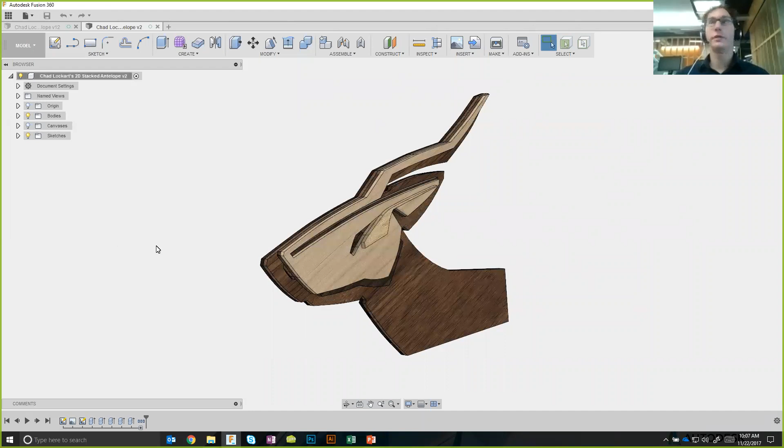So I told you earlier, we're going to be designing a 2D stacked layer product. In this particular case, we have this really cool antelope, and we're going to be showing you how to take it from a sketch all the way to 2D.

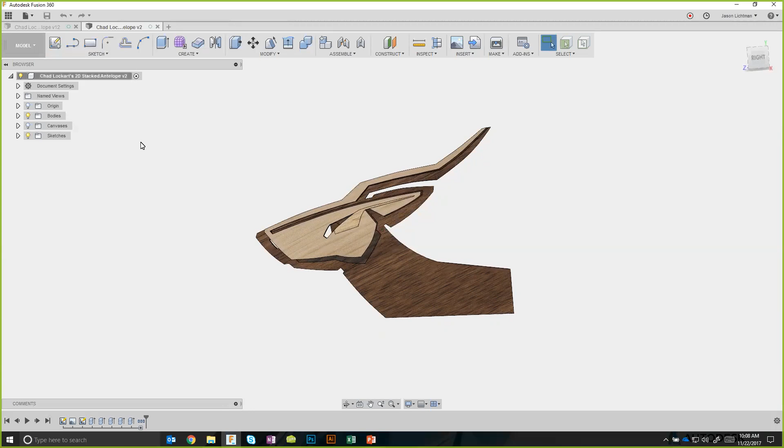As a preview of what we're going to be doing on the next webinar, we're going to be taking a very similar design, the same sketch, and we're going to turn it into the same 2D stacked layers, but this time much more 3D. Because if you notice right now, all of these layers are all parallel to each other. It's really just stacked on top, and that's it. But if you wanted to turn this into a 3D thing, you could do that as well.

And so this is the same design, and this time you're going to see that it has a plaque as the background, and the design itself is mirrored on the left and the right side. So it doesn't matter which side you're looking at this from, it's cool either way. And we're going to be going over how to take a similar design as today and show you how to make it more 3D like this and add a plaque as well.

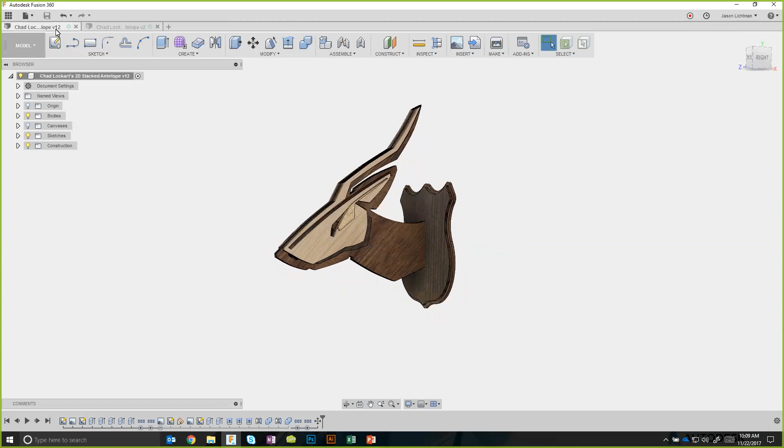So I'm going to continue on. So we said today we're going to be focusing on this antelope and how we made it. So the first thing we have to do is come up with a plan on what we're actually going to design. In this case, it's going to come in the form of sketches.

Let's come here into my folder and let's take a look at what we have. We're going to go under here, and I believe my images, I believe it's going to be this one. Nope, go back. There we go. No, also not. Hold on just a moment, everyone. There, I finally found it. I apologize for the delay.

And once he comes up with a plan, he's going to have one of these in particular that hopefully he likes better than the rest. And that's what we're going to actually use today. So I'm going to go back into Fusion, and I believe we showed this on the very first webinar, but if we were to start from scratch here, I'm going to show you a new design.

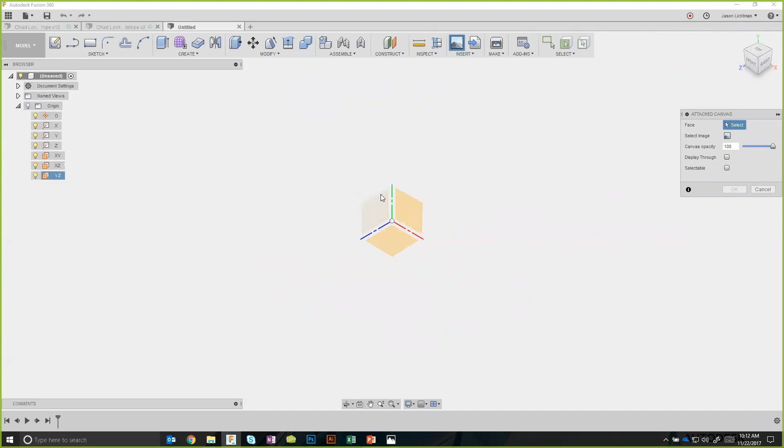If I look at the same thing, I can see that the front view is parallel to the Y and the X, like that plane, and the right view is parallel to the YZ. That can also be looked up over here on this origin area on the left. I can come in here and choose the right plane by picking YZ, or I could just pick it visually in the center of the graphics window. So I'm going to pick that, and now I get to pick my image.

It turns out in my laser cutting folder under laser antelope, I have image number 1. When I bring this in, I want you to notice that the scale, looking at this in a right view, is really small, or at least it seems small. But I can change this anytime I want by simply grabbing on this manipulator and stretching it out.

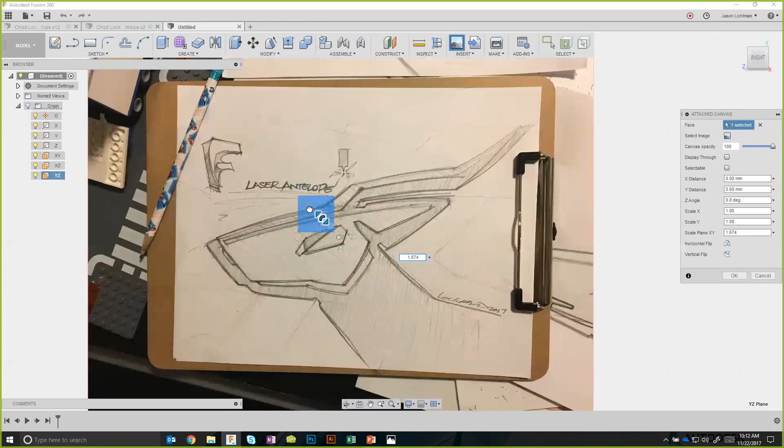I can also use the up manipulator to drag up and down, the left manipulator to drag left and right, and then I could drag this square, and then it lets me drag anywhere I want. So I can set this up however I want, and then I can also scale this however I want. But if I have a size that I'm thinking I want to use, then we should set that up as well.

I'll show you how to do that in a moment, but before we do, there are a couple of settings I like to turn on. I like to turn on display through, which is going to allow any 3D object you create in front of this image to be semi-transparent, so you can actually see the image through the 3D object. And also, what's going to help that, especially for sketching, is changing the canvas opacity down. You can pick anything you want, something like 50%, whatever. I don't pay too much attention to this, as long as I can see that it's semi-transparent, then I'm good.

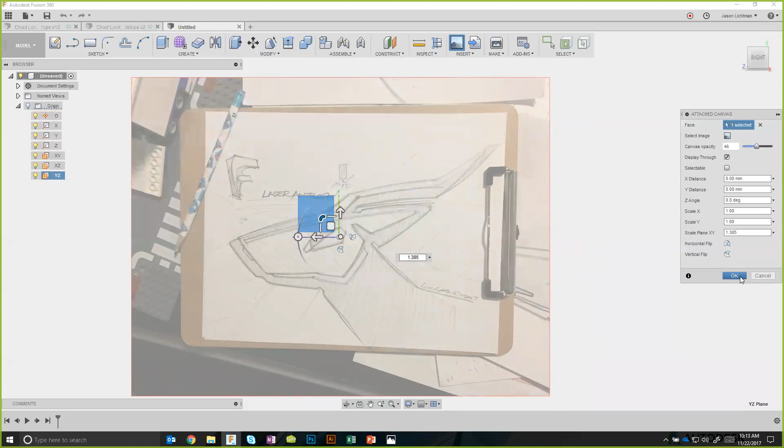Then I have this folder here called Canvases. If I click on the Canvas folder, I have my image, and I can right-click on it and choose Calibrate. The cool thing with Calibrate is I could pick any 2 points, like maybe the point of the nose of the antelope and the very far area on the back of the antelope, and I can now see a distance between the two and choose how big I want this to be. So this could be any size you want, whatever you want is fine.

I could pick 12 inches, even though you saw metric a second ago. Hit OK, it scales it up, and when I zoom out, now the distance from this side of the antelope to the back of the antelope is about 12 inches. So that's really helpful for sizing.

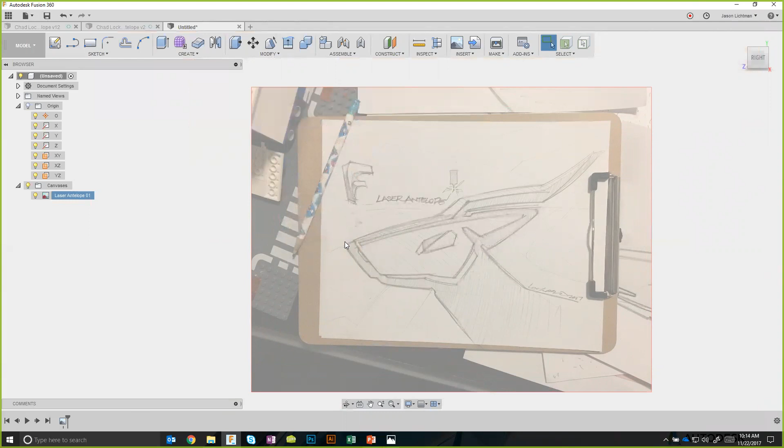Now that I have this, I can start to actually make my sketch. So I have this thing, I'm going to go on the same plane as before, the right plane or the YZ plane. I can right click and say create sketch, and now my goal is to actually trace my image.

So I have all these tools in this sketch drop down that I can use. I can use lines, rectangles, and we have 3 different kinds of rectangles, circles, and we have like 5 different kinds of circles, arcs, polygons, ellipses, slots, splines, which are a more advanced technique that I don't think I'm going to go over unless we end up having a lot of time at the end.

I'll go over splines. We have points, we can do text, and then these things at the bottom are basically modifying existing sketch geometry. But if you want to start off and create new geometry, it's these things right over here. Let's start off and figure this out as we go.

Lines are obviously the simplest, right? Lines are going to be straight. So if I pick a point, let go with my mouse, drag the mouse and click again, I'm going to end up with a literally straight line. If I click again, it can basically continue and make as many lines as I want. That's not exactly what I want in this case, so let's delete this whole thing and try again.

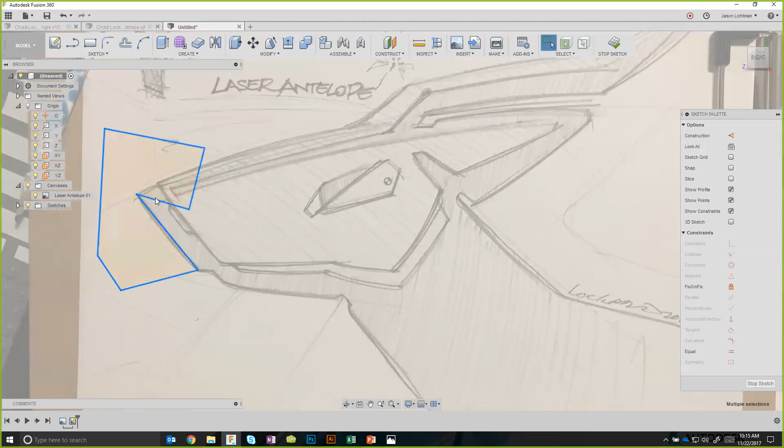This time I'm going to use the L key on my keyboard, which is a shortcut. You notice that the mouse cursor changes to an icon that represents that we're going to do a line. I'm going to click on the first spot, click on the second, and this time I'm going to hit the Enter key and it finishes the line.

Now, technically speaking, this is sort of following the sketch in that the points are in the right place. But notice that the sketch itself realistically was curved here. It wasn't really straight, so I don't think a line is actually going to be the best choice.

But we do have another tool here called Arc that I think is perfect for most of what you're going to see here on our antelope. So I'm going to pick this 3-point arc. This time I'm going to click in the first place, click in the second, and then when I move my mouse, it's actually making an arc where the radius or diameter changes based on where I click the third time. So I'm going to come in here and click a third time in this spot right there.

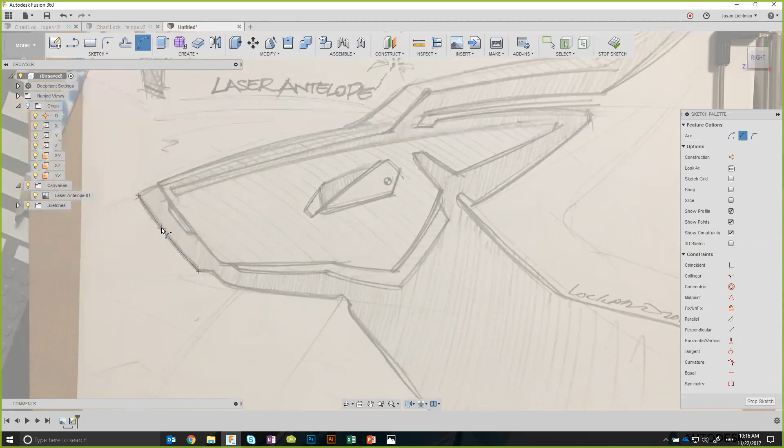And now I have a traced area of my sketch that I think is actually looking much better than the straight line. Now, I could do a couple of things. I could leave this exactly how it is and just continue on.

And if you recall from our previous webinars, if you have a line that's blue, or any actual sketch entity that's blue, it means that you can move it. So I could click on this and drag it and it'll move. Moving it is both good and bad, right? In this case, I'm following my sketch behind me and I know that this is actually where I want it to be, so I really don't want it to move.

Now, we talked about how you can make things not move, right? The way you could do that is basically 2 ways. You can apply constraints that are here on the right-hand side. Like I could say that I want this circle - and I'm going to make this up right now - this circle and this circle, I want to make the center of those 2 things coincident. And now they're going to force themselves to always be on top of each other, even though I could still drag the diameter. That's one way, those are constraints.

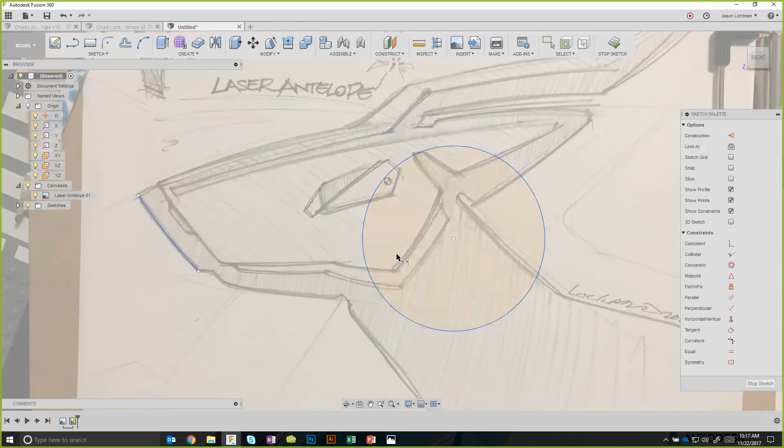The other way I could do it is apply dimensions. So I could say something like I want the diameter of this circle to be this amount. And then I could say that I want, let's say, the circle to rest on my origin, and then it's going to turn black. When it turns black, that means that you can't move it anymore - at least you can't drag it. I could still change my dimension, but I can't actually drag it, and that's why it's black. But if I get rid of my dimension, hit delete, now it's blue again.

Now there is a trick for you, another thing you could do. If you want to see what the size is as you're dragging it, I'm going to hit undo so that my dimension pops up again. This time I'm going to right click on my dimension and choose toggle to driven. And now you're going to see parentheses on the outside of the dimension. What that means is that I can actually still drag my circle in this case, and the dimension changes.

Basically, this dimension is in the passenger seat. I'm driving the size by dragging, and this dimension itself is being driven - it's sitting in the passenger seat while I drive the vehicle that changes the size. I hope that makes sense.

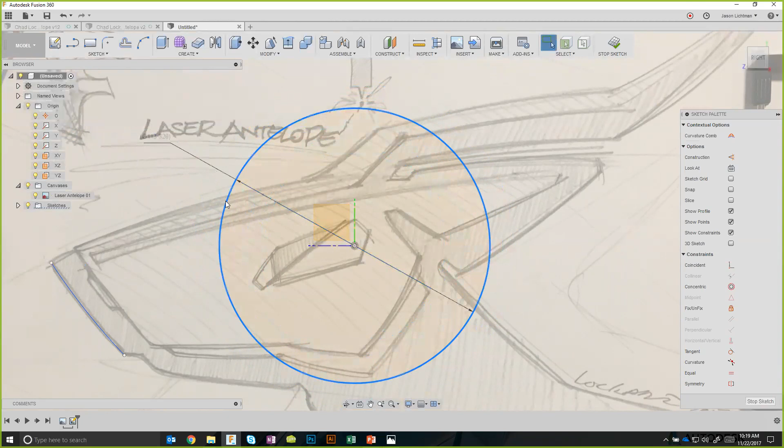I can apply dimensions and I can apply constraints. Now there is a third way that you can make things not move, and that is to basically say I want to lock this thing into position. The way you do that is a constraint called fix or unfix. If I pick this circle and choose fix, you're going to see it turns green, telling you that this thing is fixed.

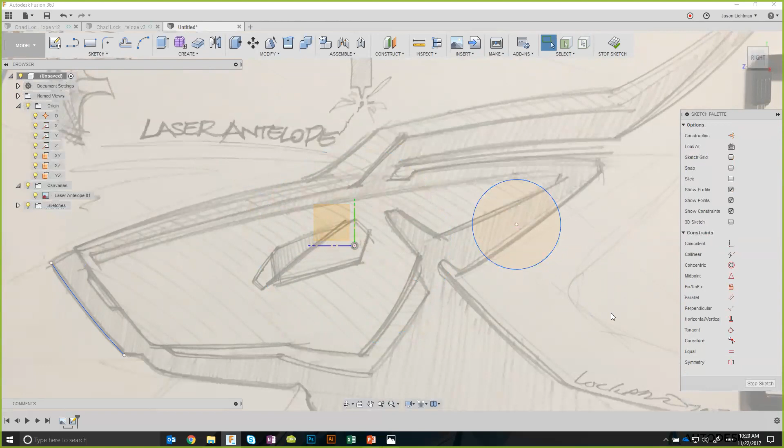No matter if I put constraints on this or not, if I just draw a circle in space and click on it and say fixed, the center and the actual diameter are all going to turn green and are not going to be movable. I can't drag this anymore. If I do want to move it, I can click on this again, click fix or unfix again, and now it's unlocked and I could still move it around or reposition it.

For something like this, where you're sketching on top of an image, I think that locking things down is actually going to be your friend.

In this case, I'm going to pick this arc and fix it in space. Notice, by the way, that the arc itself is green, but the endpoints are white, which means I could still drag these around - but I actually want those to lock in space as well.

So I'm going to pick these two points, hold control between clicks so that I can select both of them, and I'm going to choose fixed for that as well.

Now I do want to show you a variation real quick before I move on. If I undo all of that - perfect, so now I still have the blue version - if I pick the endpoints only and fix those, I can't move the ends anymore, but the arc also has a diameter, and I did not lock that down yet. So if I zoom out, I could see the center of my diameter, and I can come in here and move that and still change the size.

So for something like an arc in particular, you are going to need to lock down the endpoints and the middle as well. So now I pick the middle and say fixed.

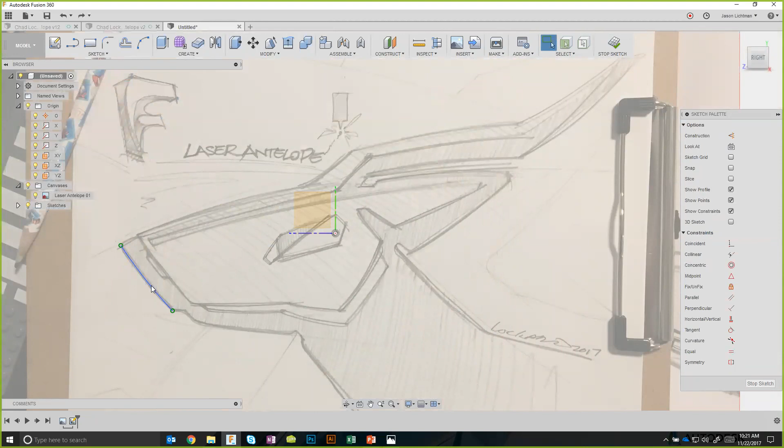Now I want to come in here and basically do the same thing over and over again until I get what I'm looking for. So I have an arc like that, and I'm going to fix that in space. I'm going to take this endpoint and fix that in space. I'm going to do the same thing again - maybe this time I'm going to go like this, something like that.

You know what, I'm looking at this, and I'm thinking this is actually supposed to be straight. So let's draw a line from the end over here to this point over there, and I'm going to lock the end of that line. That by default means the entire line is now locked down.

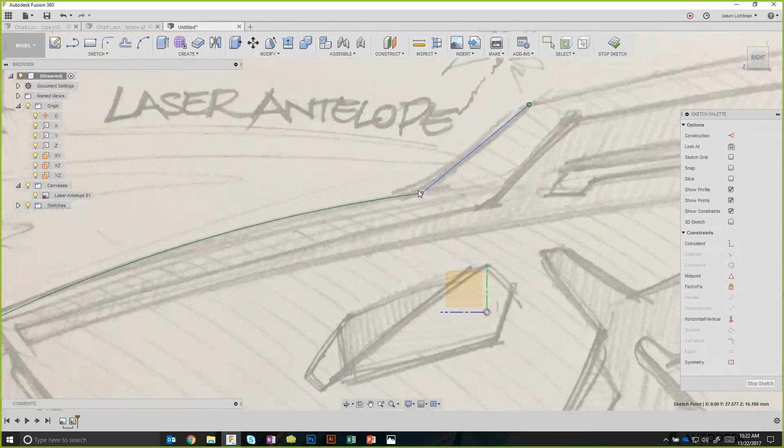But the base of this line isn't exactly in the right spot. So like before, I can click on this endpoint, hit the lock button again, and it unlocks it. And now I can come in here and adjust this slightly until I get it where I want, and then I could lock it down again.

Cool, so I'm going to go ahead and do this a little bit faster now. Perfect, lock that down. We don't unfortunately have a keyboard shortcut to fix things in space, at least at this point. It's a little unfortunate, but we are working on being able to customize shortcuts for locking things down - that's something on our radar and we're working on.

Perfect, so now I'm doing a line. I'm going to fix this line. Perfect, and that point right there. Perfect.

I'm going to jump ahead and show you what this will look like when it's done, since we only have 38 minutes left and I don't think you want to watch me sketching over and over. What I want you to know is that what I'm sketching is really just a combination of arcs and lines based on this particular geometry. I don't see anything more complicated than that here.

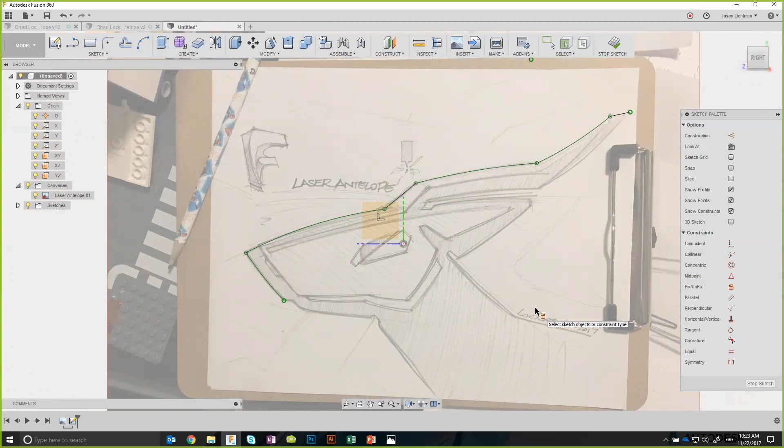Let's go look at our finished sketch. Notice again, just like before, everything is green. All the endpoints are green as well, which means everything is locked down. You also have these orange circles that I added, which weren't there at the very beginning. I'm intentionally not going to tell you what those are yet; we'll show you later in this lesson. But all in all, this is a lot more detailed sketch than when I started.

Let's show you what the canvas looked like. This is the background image, and you can see all of my line work on top. Is this perfect? Absolutely not - I did this pretty quickly and didn't make it perfect. Keep in mind that the sketch you're using as a background is really just a background image, and you don't have to actually follow it. It's intended, for the most part, to be there as a guide for your design.

What I want to stress is that the design itself is not the sketch. The design is what you're drawing in Fusion. As long as you're happy with what you're drawing in Fusion itself, I don't really care if it matches the sketch behind it - for the most part you want the same design intent, but it doesn't have to be perfect. For example, the nose of my sketch in Fusion is not in the same place as the nose on the actual 2D sketch that came from Chad Lockhart.

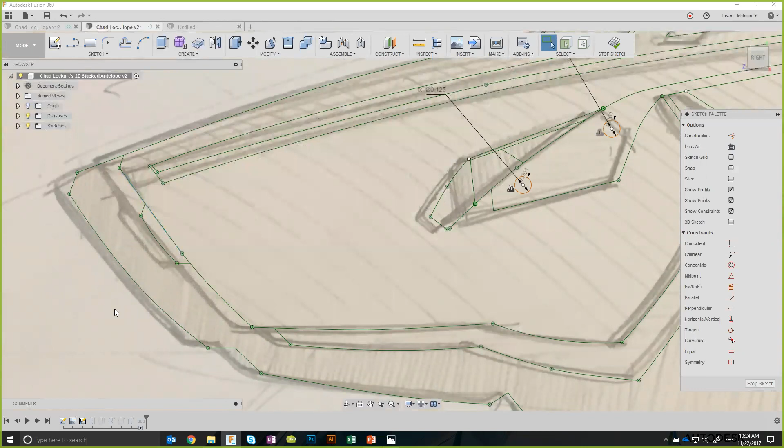Let's get rid of this canvas. Notice that the actual antelope has this yellow fill in between all the green lines, and depending on where I hover with my mouse, different areas of my sketch will highlight. The way Fusion works is that it looks for a closed loop of sketches.

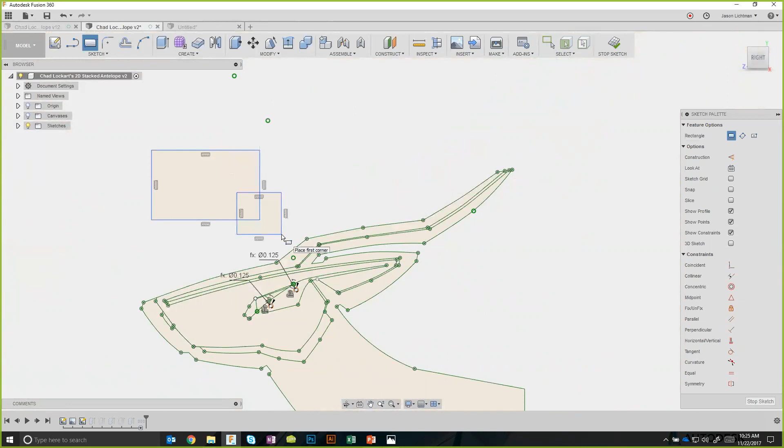So if I draw a rectangle, and then another rectangle slightly overlapping, I could want to do something with this area, or this area, or some combination of them. Basically, Fusion is showing you all of the different combinations. Let's get rid of that square, that rectangle, and this one too.

Here I have my sketched antelope, and we're going to stop the sketch. I'm happy with that so far. Let's go through line by line what's happening here in my timeline to see how I actually built it.

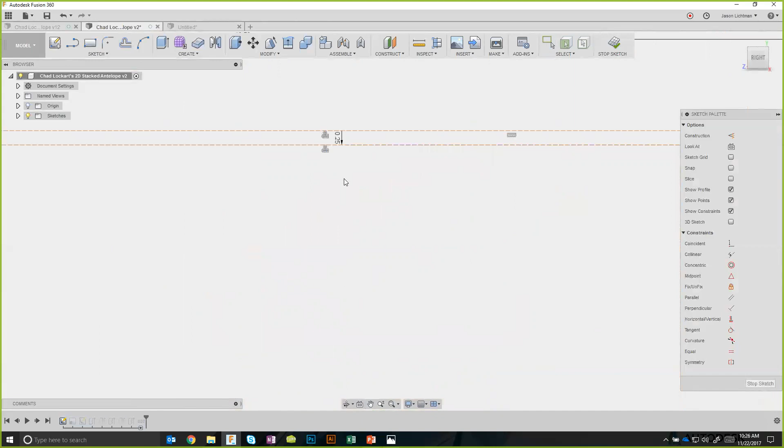Another thing to note that I should have mentioned at the very beginning - I created an additional sketch representing the size of the Glowforge bed, which currently is 11 inches tall and 19.5 inches wide. Then I made an offset of a quarter inch, and you can see that dimension right over here.

Let's get rid of it, and we'll rebuild it so you can see exactly how I did it. Let's pretend I'm doing this from scratch. I hit the letter R on my keyboard and make a rectangle. Then I hit D and put a dimension for the width, 19.5. Then I clicked on this left vertical line, clicked again, and hit 11 for 11 inches. Then I double-tapped on the entire thing and hit this little box called construction - I did this because we're not actually going to use this to build anything.

I'm using it more as a reference to make sure that everything that I build in Fusion is actually going to fit in the Glowforge bed. So I don't really need it to be a closed line. In fact, by keeping it dotted as construction, it's going to let me not select it by accident, which is going to be helpful, so I do encourage you to make it construction.

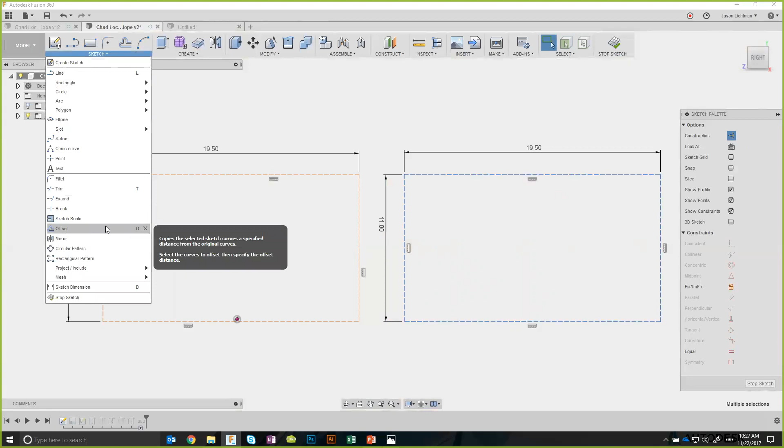Then I can double tap on any of these lines and it automatically selects the entire rectangle. Then I can come under Sketch, Offset, and drag this in to make sure it's inside my box. I could type in 0.25, enter, and I chose 0.25 inches, but you could choose whatever you want.

Basically, we all know that the camera on the Glowforge is not perfect, and the alignment could be off by about a quarter inch. So what I'm doing is making sure I stay a quarter inch away from the edges of my material so that I don't accidentally laser off of the material and waste a chunk of it. By keeping it within the boundaries, I'm not going to have any issues there. Think of this, if you come from a background in graphic design, as like my bleed area for my part.

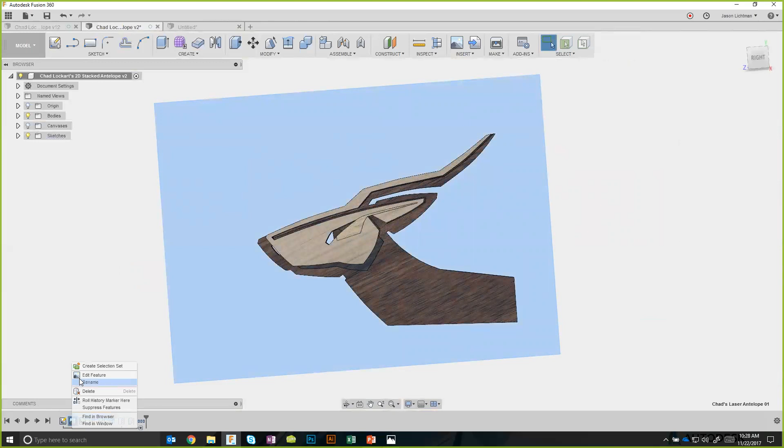So I'm going to undo all of this because I already had this set up. Get rid of all that. Perfect. And the cool thing here is when I actually brought in my image, I made sure that my image itself—let's go and edit that—there we go, is within the boundaries of my Glowforge.

So this way I make sure that no matter what, I'm not making the scale too big so that I can't even laser cut this on the Glowforge. It's all within the bed and it's going to work out no problem.

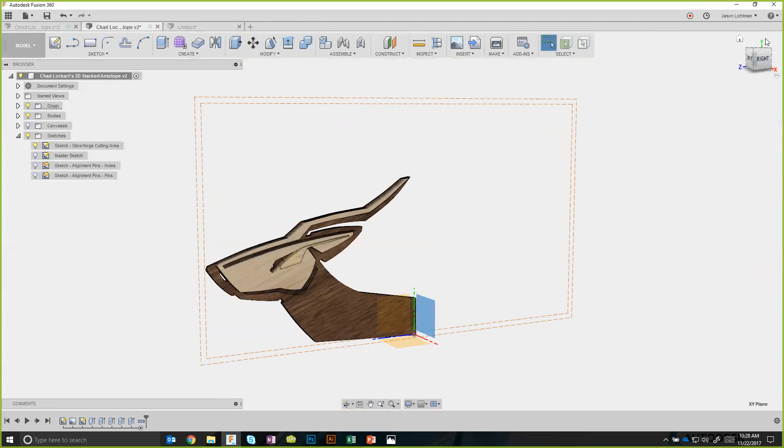So this is just a preview of how I set this up. And I also set it up so that the back of the antelope is actually on the same area as the front plane of my part. That's as though this were sticking out of a sidewall—like I basically took this entire thing and shoved it in the corner of my wall against the wall next to it. Okay, so now that we have our sketches, let's actually take a look at that.

We're going to go back in time on my timeline. To do that, I'm going to drag my mouse until I get to here, click with my left mouse button, and drag backwards. Basically now I am at the moment in time where the sketch for the antelope has already been created, but the 3D stuff has not yet been created. So we're going to go and actually do that ourselves.

To do that, I'm going to click on the Extrude button here, and you can see a pop-up telling me what I'm actually doing. When I do that, I have to select a profile. Just like before when I was in that sketch, I can hover over here and see all of the different options I have available to me.

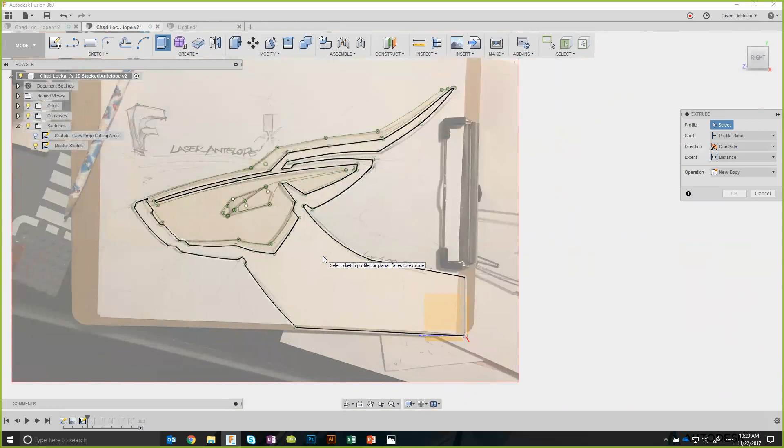Let's actually bring up our canvas, and then it'll be easier for me to select. I know that the first layer is basically going to be all of these things combined. So I select here, I can select here, select there, select this, and I believe—I could be wrong—but I think we're going to add that too. And then we're going to add this piece, and we're even going to add this little sliver in. So all I'm doing, I'm not even holding control, I'm just selecting.

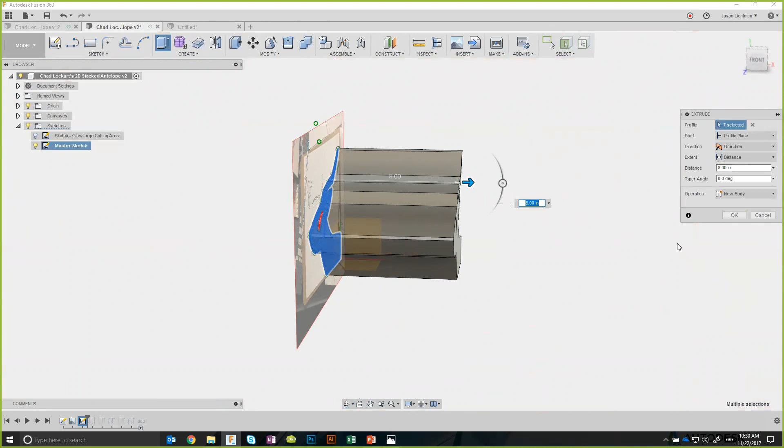Then I have to choose how thick I want to make this thing, so I can pull this any amount that I want. Let me zoom out and you can see what's happening there. I could pull this any amount I want, 11 inches, 12 inches, whatever I'm preferring. But realistically, we're going to want a thickness that's set to whatever material we're going to use. So for now, I'm just going to hit OK, even though I know that dimension is wrong.

I'm going to go under Modify, Change Parameters. Here you're going to see that I have a bunch of parameters that I created for myself. To create a new parameter, I come in and hit the plus symbol, type in the name of my parameter, choose what units I want, like inches for example, and then a value—that's the expression. So I have one here called thickness, and it's set to 3 millimeters.

Oh, excuse me, everyone. Sorry for that sneeze.

I set the thickness to 3 millimeters. And then I have another one here called minimum material, and I don't think we're going to be using that today, but I created that anyway.

And then I created one called kerf. I don't really know what the kerf is going to be on the Glowforge, I didn't really look it up, but for now it's set to 0.001 inches.

And then I also made another parameter for the alignment pin diameter. We haven't gone over this, but we are going to make alignment pins to make it easier for us to align everything. I believe the alignment pins are going to be 1/8 of an inch, so I set them up to 1/8 of an inch.

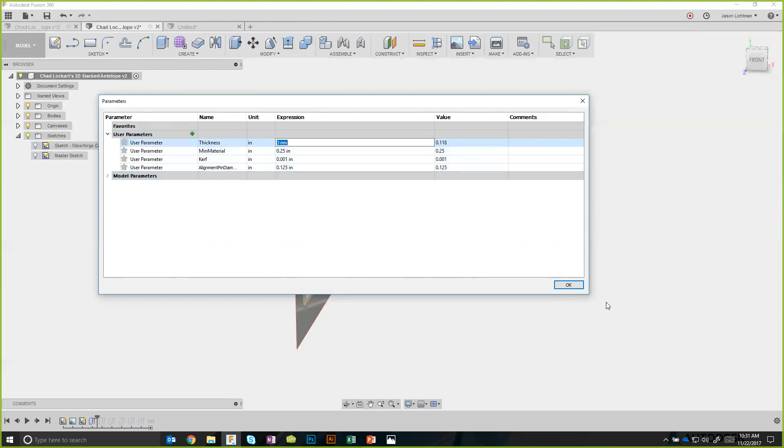Now remember the names that you chose here because you're going to end up needing to type those in later. So far, we created our sketch, and then we extruded a profile.

That's this giant thing here. And our thickness is incorrect, so let's go and fix that. I'm going to come here to my feature, that was the extrude, and I could right-click on it, say Edit Feature, and then I could change the thickness from 8 inches to anything I want.

But we created a user parameter called thickness, so all I have to do is type in thickness, and you can see here one comes up, and when I hit it and say OK, notice that everything is actually quite thin right now.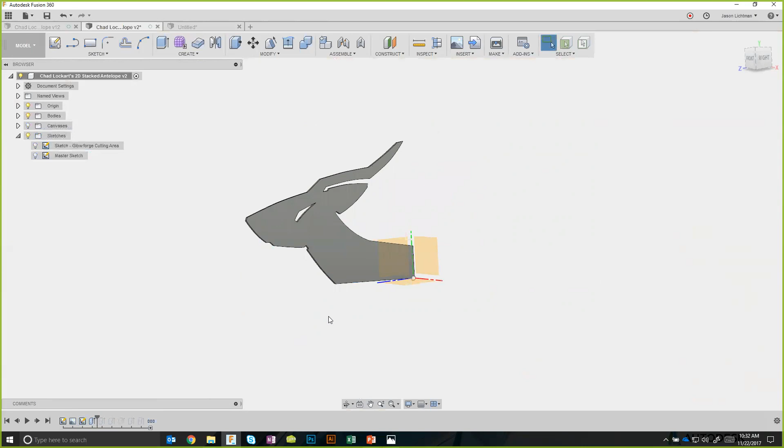And it's thin because it's now the same thickness as we chose for the thickness parameter, and that was 3 millimeters. That's roughly, I believe, what the medium proof grade material is. But of course, you could adjust this based on a caliper measurement of the real material.

So now I have this panel, and we want to create the next layer in this thing. So let's go and take a look at our sketch again. Actually, I'm going to hide the existing thing, and to hide the existing thing, I'm going to go under Bodies, and I'm going to turn this light bulb for this body.

And by the way, I might want to name this thing. And so maybe this is called layer... hold on, I actually think we're going to call it layer 01. That's simple.

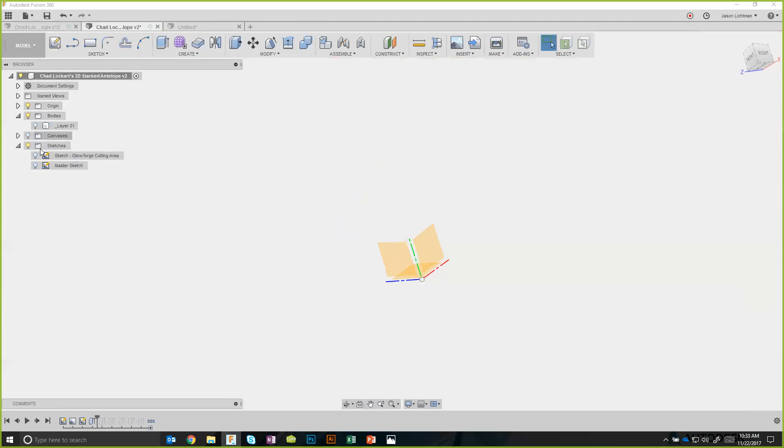Okay, now we're going to go and create layer number 2. So I'm going to hide layer 1, show my sketch again, and then I'm going to make another extrude. And now I have to pick, what do I want this other thing to be?

So let's look at our real sketch again. I could see I'm probably wanting this area and this area. Let's look at this in more detail. Probably this area as well, this one, that one, and this sliver. And I think we're not done yet. I think that's... now I think we have it.

And don't, by the way, it doesn't matter if I'm wrong because I can always come back and adjust this. I really want to stress this, that there is no wrong way to do this because you can always go back and change things.

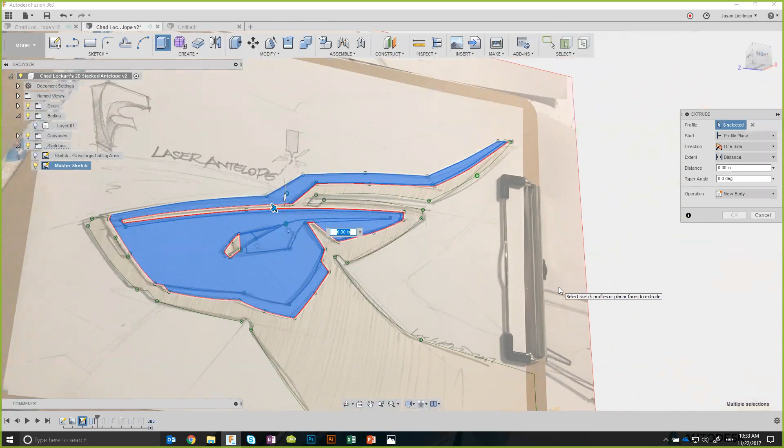Now I'm going to drag this arrow to a certain thickness, and we don't need it 3 inches, we already decided it's going to be the same thickness for everything. So I type in thickness, perfect, and I say okay.

Now if I hide my sketch and I hide my canvas, this is what I got. Now, I know I messed up here. You guys might not have realized it already, but I definitely messed up.

If I show layer 1, any idea what's going to happen right now? If you have a chance, type in really quickly into the Q&A or the chat window, what's going to happen if I light bulb to show layer 1 and I'm also showing layer 2?

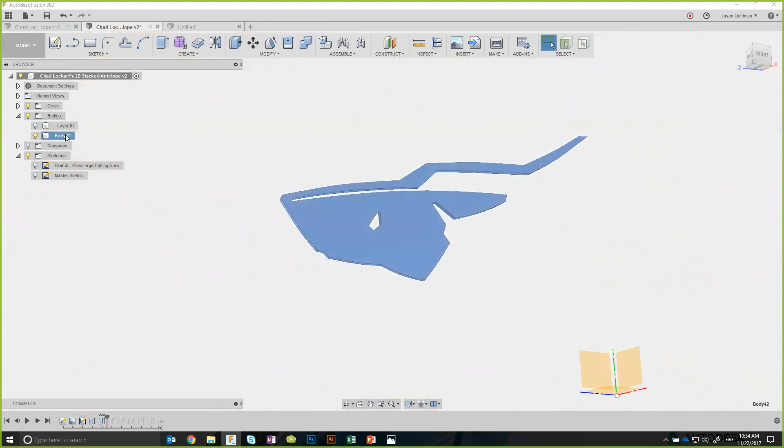I'm going to show layer 1, and it looks to me like layer 1 and layer 2 are right on top of each other. We wanted this to be stacked, and it's not. So there are a couple of ways I could do this. I could leave this as it is, laser cut it, and just stack all these together by hand—that's no big deal. But if I want to visualize what this is going to look like before I make it, I want the 3D model to reflect what it's going to look like in real life. So there are a couple of ways I could do that.

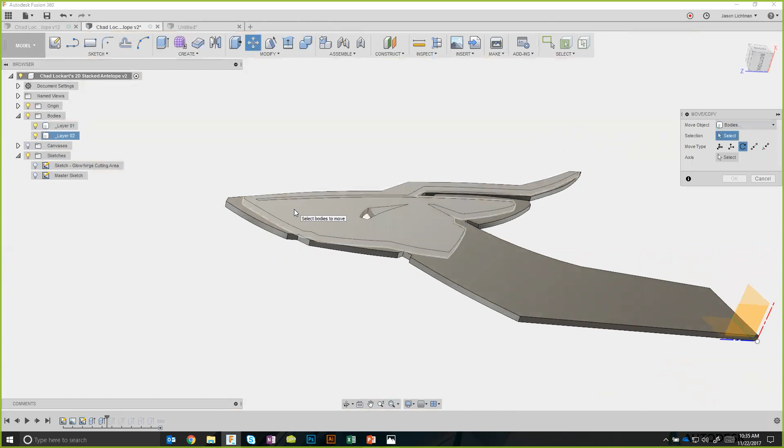The first way is the way I don't prefer. I'm going to click this Move Copy command, choose layer 2, then come over here to the Move Type and say Translate. I could drag this arrow and move this anywhere I want, and this is going to start to look 3D. But keep in mind, I'm probably going to have to come in here and choose exactly how much I want to move it so that it actually is layered the way I want it to be. I could do it that way, but I don't really love this method as a whole.

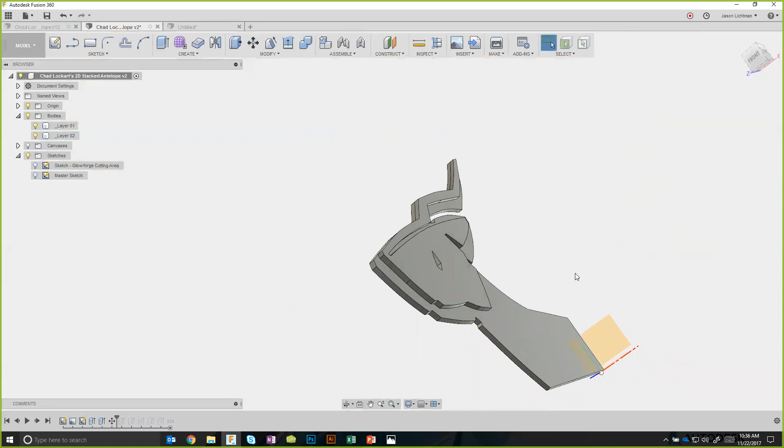By the way, if you want to know the distance, instead of typing in a number here, you can actually type in that same parameter, like thickness, and in theory it's going to move it to the exact right position because it moved it the thickness of one layer over. So even if I change the value for that thickness, everything is still going to move into the right location. That's pretty handy, and I'd say it's a little more of an advanced tip, but I think it'll be useful for you.

Now, I don't like that method overall, like I said from the beginning, although you can do it that way if you'd like. So instead, I'm going to right-click on this move and delete it, and we're going to start from scratch and figure out a new way to do it.

The new way is going to be to edit the extrude itself that created layer number 2. We're going to right-click and say Edit Feature, and figure out a new way to do it. Now we have a couple of options here I have to point out.

One of them is the Start. I could choose whether I want to start this shape from the profile plane, meaning where the sketch was, an offset plane meaning a new plane that I pick, or an object—and I could pick pretty much anything I want for an object, like a point or a face of my 3D object. Also, I could choose the direction I want to extrude this: one direction, or two directions, and if two, do I want it to go the same amount in both—that's called symmetric.

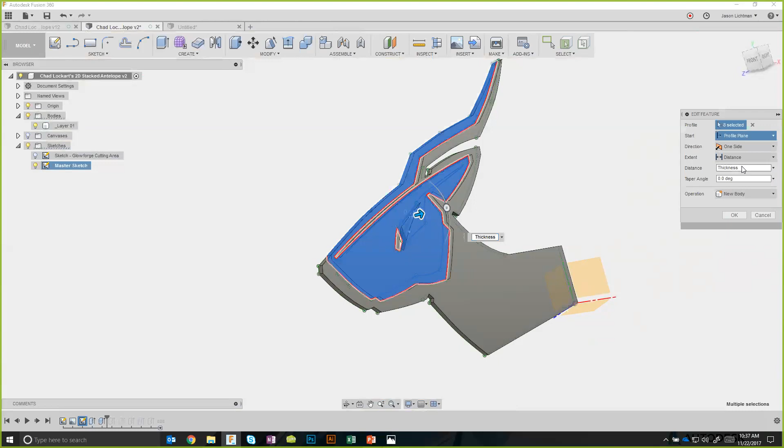And I could choose whether I want it to go a certain distance, or to a certain object, or go all the way through, which really applies to cuts, although it can apply to joins as well. But for now, let's make this simpler—I'll just tell you the answer. I want to start at an object, and the object in this case is going to be the side of layer number 1.

I want you to see the preview of what just happened. Layer number 1 started at my sketch and went to the right by the thickness of our proof grade material. Layer number 2, even though the sketch itself is over here on this left side, is going to start making the 3D stuff from the end of layer 1 and then go the thickness of our proof grade material. The way I did that was choosing Start from Object, and then I chose an object as this side of layer number 1. When I say OK, it's actually automatically in the right spot.

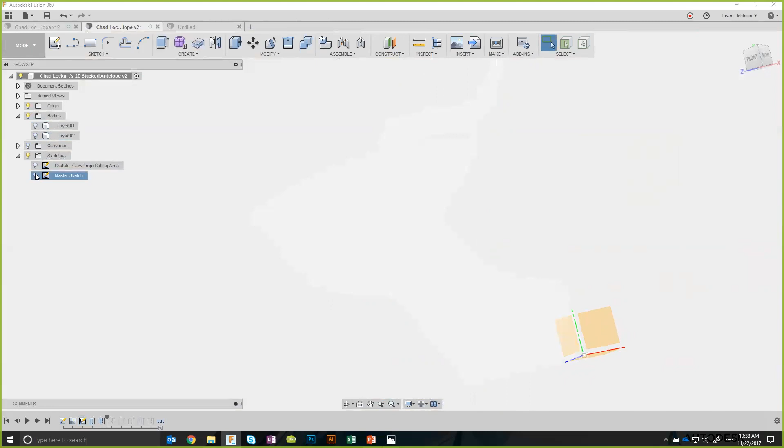That's absolutely perfect. Let's go and do that again for layer number 3. I'm going to hide layer 1 and 2, turn on my sketch, turn on my canvas so I could see exactly what I want to select, and then I'm going to hit Extrude and choose this area here, this area, I believe this as well—and I could be wrong here—and I think that's it.

Again, I could be wrong, but I think that's it. Now that I've done that, let's hide the canvas. Notice I'm still showing my extrude toolbar here.

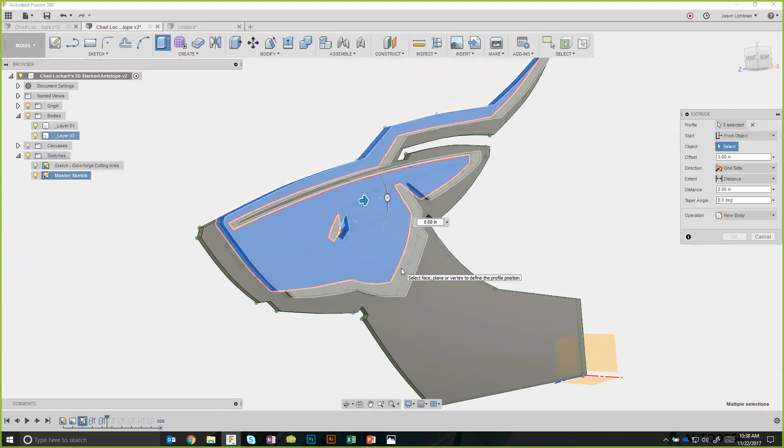I'm going to turn on layer 1 and layer 2, and let's do the same thing as before. I'm going to change my start from profile plane to object, and this time I'll choose the end of layer 2 as the start of layer 3, and for the distance, I'll choose thickness. And I'll say OK.

Now, I made another mistake. I don't know if you noticed, but in my bodies folder, I only see layer 1 and layer 2, and layer 2 looks super thick. Let's hide layer 1. It looks like somehow, by accident, layer 1 and 2 are now one big thing, one big layer, which in reality is not going to work for us at all.

So let's go back to this extrude for layer 3, right-click, and say Edit Feature. Notice that at the very bottom, where it says Operation, instead of Join, I want to change it to New Body. Basically, I want a new layer for that third layer. Now when I say OK, I see layer 1, layer 2, and layer 3.

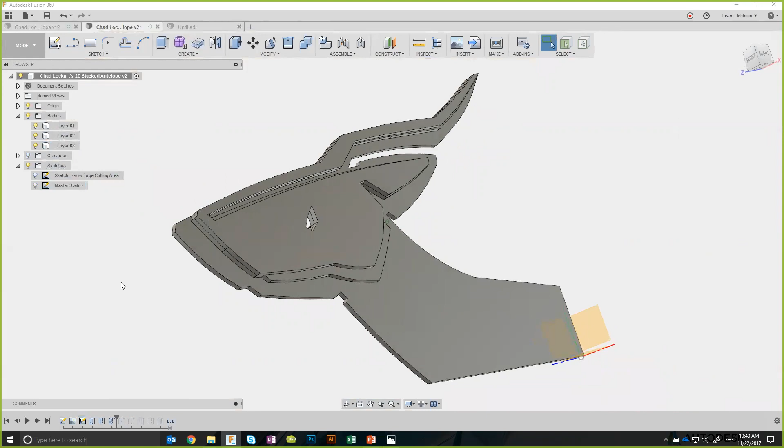Perfect. Now, to make this a little easier to see, this would be a great time to apply colors to my model. So I'm going to hit the letter A on my keyboard, which is a shortcut for our Appearances window.

I have a bunch of wood set up already, but even if I didn't and wanted to paint this a different color, I'd say I want to paint, and choose paint. Maybe I'll pick a glossy paint, and choose blue. All I'm going to do is drag it onto one of these objects, and now that one's blue.

I'm going to take the green one and put it as layer 2. And then I'm going to take maybe the red and drag it to layer 3. Cool, now it's a little easier for me to see these.

And I could tell you right off the bat that I must have messed up somewhere, because although this is overall looking pretty good, this isn't what I was supposed to have, at least not by the eyeball, the eye area. So that's no problem.

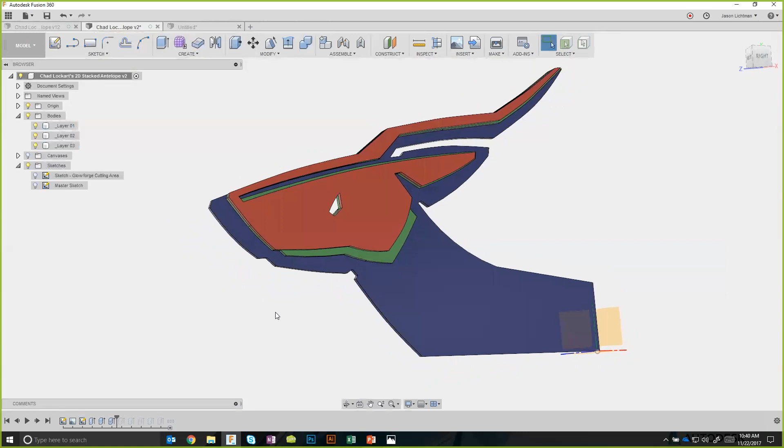All I'm going to do is show my sketch, get rid of layer 1 and 2 visually, right-click on layer 3's extrude and say Edit Feature. Then I'll go under Profiles, unselect that area right there, and say OK. Let's re-show everything.

And now this is looking much better, right? This is looking kind of like I expected. So now let's go ahead and make layer 4.

We're going to do that just like before. I hide layer 1, 2, and 3. Then I'm going to show my sketch and go to Extrude. This time, when I show my canvas, I'm going to pick this area right here. I'm going to hide my canvas again and show my layers.

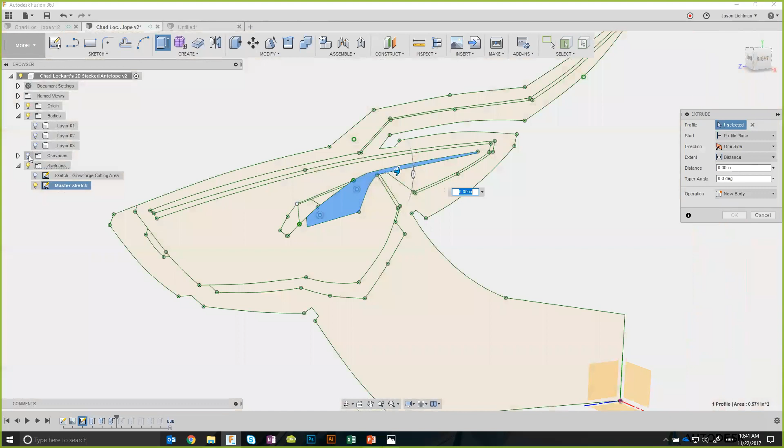Then I'm going to say I want to start instead of profile plane from object, and I'll pick the end of layer 3. And for my distance, I'm going to choose thickness.

Perfect. It looks like just like before, I wasn't paying attention enough, and so layer 3 and 4 were combined. But I could fix that again just so easily: Edit Feature, instead of Join, New Body, and say OK.

And again, just like before, I could go under Appearances and pick another color and drag that for layer 4. Cool, when I hide my sketch, now I have my object.

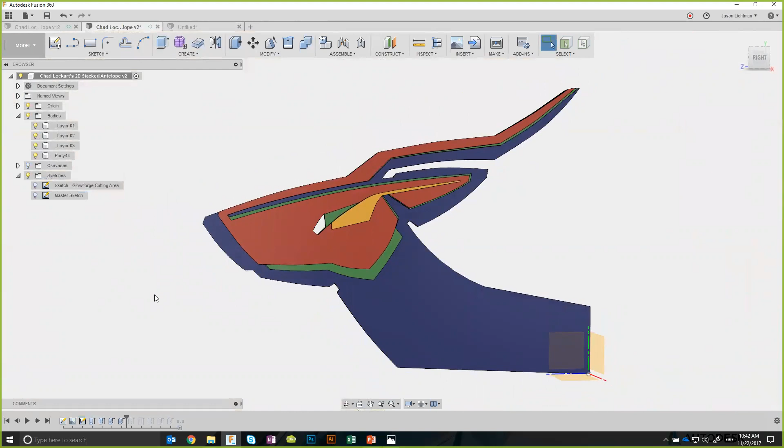Now, it does look like I messed up in other areas. By the way, these mess ups I'm doing on purpose so you could see that messing up is not really a big deal. Messing up is just part of your design process. There is no failure here, right? The only failure is giving up, and I don't want you to give up.

So let's go back and see what our end result is supposed to be, and then we'll be able to really easily see where we messed up.

So I'm going to hide the stuff we just did. And it looks like, if I zoom in a little bit, I did not include the nose at all. That was my mistake. And if I look in the eye area, because it's a little detailed, I think we messed up a little bit there as well. I think layer 2 was supposed to be a little bit different than I actually had it. No big deal, we're going to come back here and fix all of that.

So again, I go back in time slightly. Cool, now we're back to where we were a moment ago. And I'm going to rename this as layer 04. Perfect. And we can go back and fix things.

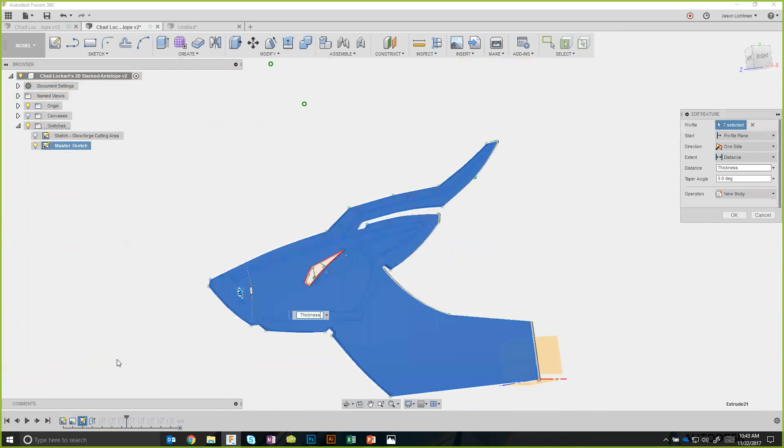So I'm going to go back to layer 1, edit the feature, show my sketch, and it looks like I want to get rid of this area of the nose. And then I believe also this area here was supposed to be filled in. Perfect, that's looking better. Layer number 2 was also messed up.

Let's go back and fix that. And this time it was supposed to be open like so. I believe like this, and that's looking better. And then what were we supposed to have for layer 3? There we go.

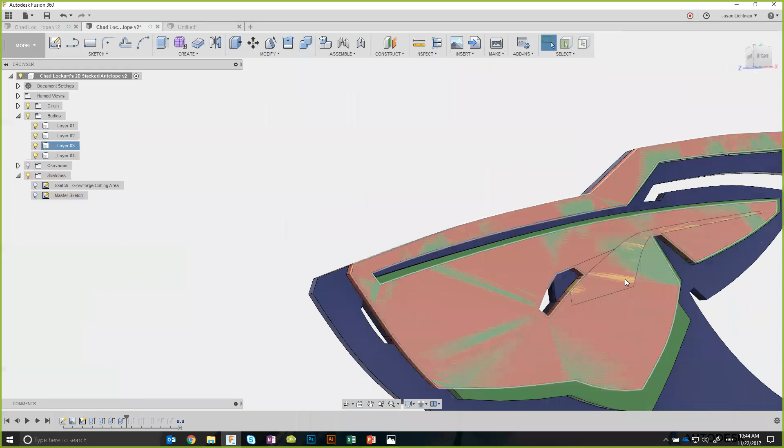And something else messed up. Let's see, I'm going to hit undo and just undo that.

Perfect. So long story short, I want you to come in there and actually pick everything the way you're supposed to pick it. Making a mistake is no big deal. It's really easy to just go back and reselect what you actually want. And when you're done, I want you—and I'm just going to delete what we did right now because I've already had this done already—we're going to show what this is supposed to look like. And it's supposed to look like this.

Perfect. So in this particular case, instead of paint colors, I applied wood colors, and I showed different species of wood for each of the different layers. But whatever you prefer is totally cool, that's no problem at all.

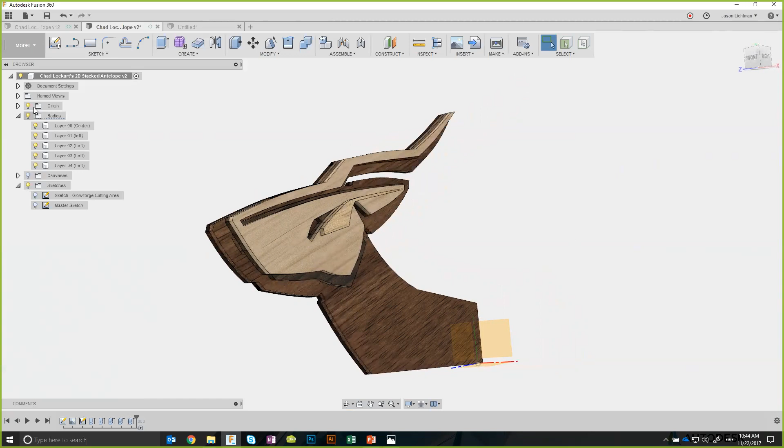And so now that I have this, let's talk about two things. One is, how are we going to align this all together? And then also, how are we going to put this into the Glowforge? So in terms of aligning together, I like the method of using alignment pins, and we're going to show that right now.

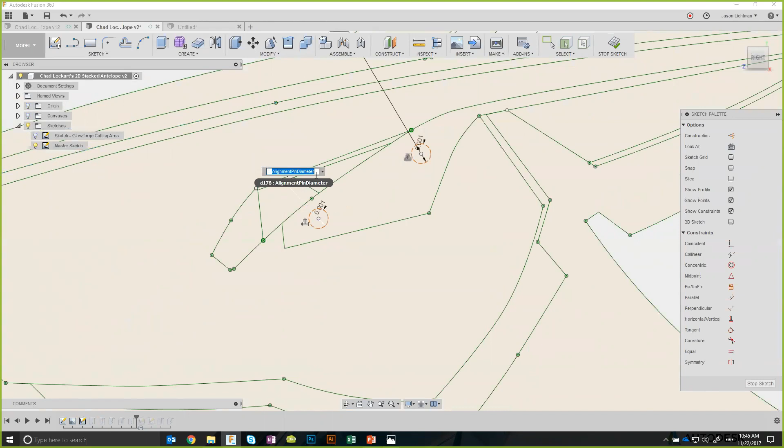And so remember at the very beginning when I looked at that sketch, I showed you that I have two circles here. So let's take a look at this really up close. I have a circle, and that circle represents a 1/8 inch dowel pin. Notice that the diameter here is set to alignment pin diameter that we actually set in our settings, so that's already automatically 1/8 of an inch.

Then I made an offset of that 1/8 inch circle with a smaller one, and the distance for that offset is going to be kerf. The reason, of course, is because when I make the hole for the dowel pin, the laser itself is going to burn some material on both sides of the vector pattern, so the hole itself is going to be slightly bigger than you might have intended. So if you intentionally undersize the lasered hole based on the kerf width, or rather half of the kerf width, then the result is going to be that the hole fits the dowel pin perfectly.

And to learn more about kerf, I highly suggest you play around on the Glowforge forums and search kerf, and you're going to find lots of really cool stuff. But in short, that's how I would do that right here.

And these circles I can actually place anywhere I want. I didn't lock them in space yet, but when I am ready to lock them, I could also just hit the fix button and then do the same thing for this one wherever I think it should be, and then that's going to lock in space as well. Cool.

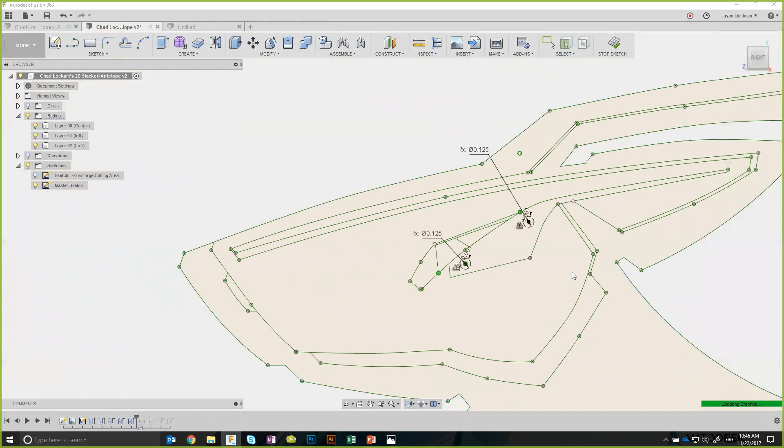So now that I have that, basically what I did was I went and extruded some pins. I'll show you that.

We're going to hide each of these layers. So what I did was I extruded two pins that are 1/8 inch dowel pins, and I extruded them from the start of where my sketch was all the way, not through every single layer, but through all of the layers except for layer number 4.

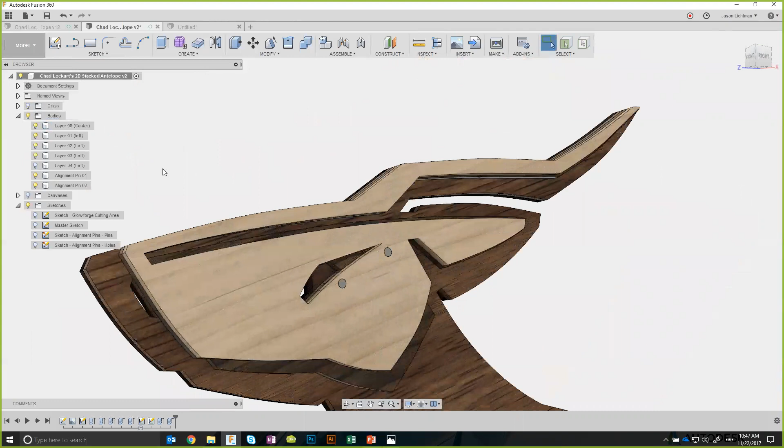Unfortunately, if you try to put alignment pins through every single layer, including the outermost layer, you're going to see circles that look kind of like this, and you might find them ugly. I personally do. So in this case, I'm actually aligning layers 1, 2, and 3, and layer 4 unfortunately would have to be aligned by hand. But that's still better than aligning everything by hand. So I'm a big fan of doing it this method.

So what I did was I made my pin, and we're going to go and edit that and take a look. The settings are basically to start where the sketch was drawn, and then go to an object. The object that I picked, believe it or not, was the back side of layer number 4. By choosing the back side of layer 4, that means the length of this pin is going to go all the way up to the back of layer 4. It's the perfect length.

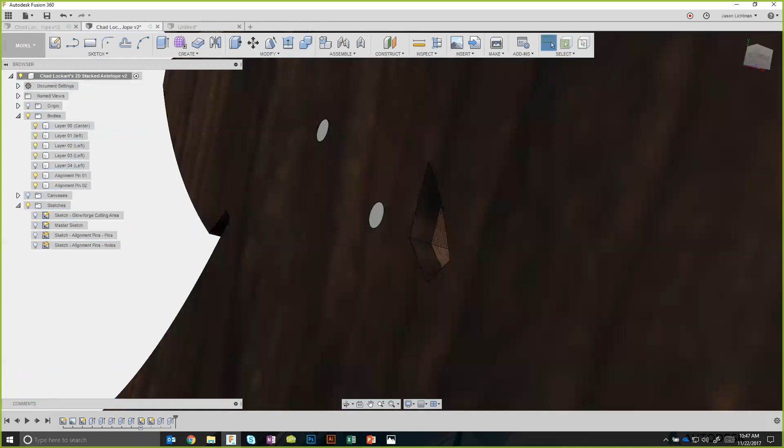I did, by the way, the exact same thing when I made my hole, and that's this extrude right here. The only difference between making a new pin and making a hole is down below here, choosing cut instead of new body. So heads up on that. I made a cut from where the sketch was drawn all the way through these parts to the back of layer 4. Perfect. Now we're going to get to the really fun stuff, which is actually taking this and putting it in the Glowforge and figuring out the right orientation to do that.

So we're going to do this live, and let's start that off right now. I'm going to look at this in the right view. I'm going to zoom out a little bit, and I'm going to show that original sketch that we created that represents the Glowforge itself. And it looks to me like we're almost set up correctly.

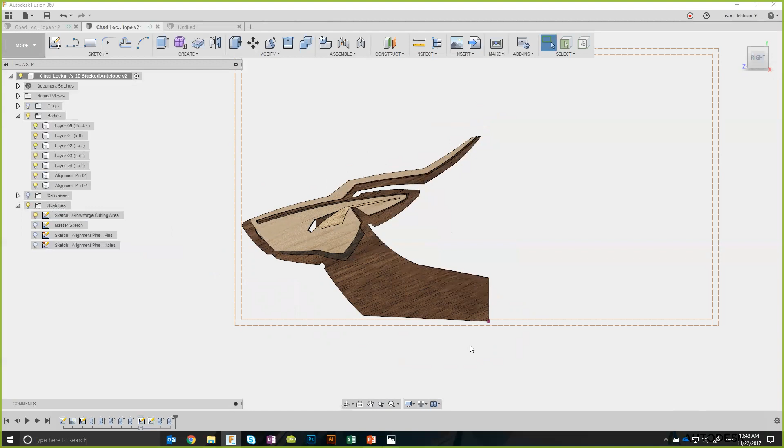We're not exactly right. So let's take this thing, and believe it or not, because we didn't constrain it earlier, even though I finished making the sketch a long time ago, I can actually come in here and move this thing wherever I would like. So I'm going to set this up so that it's about here, right? I'm taking into account keeping the edges of my parts at least a 1/4 inch from the edge of the actual Glowforge, again, to account for camera misalignment. And now that's looking really good.

Now we actually are going to move each of the bodies to new positions so that we can laser cut it. So I'm going to come up here and choose Move, then choose Bodies, and it wants me to select a body. So I'm going to pick this one right here. That was layer number 2.

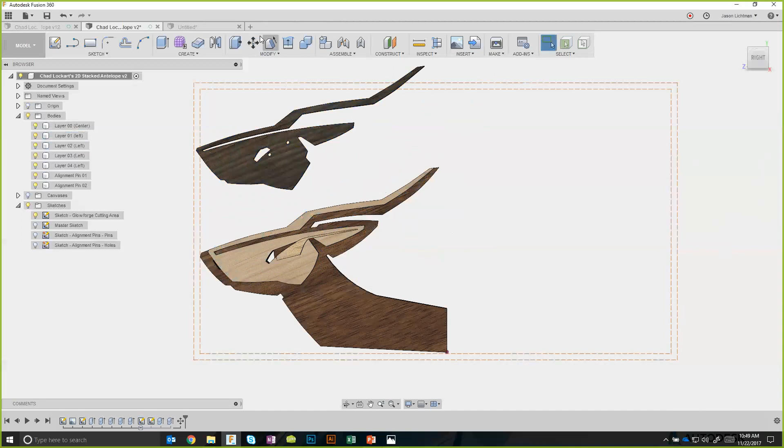Then I'm going to choose this thing called Free Move. Now, if I don't choose Free Move, I'll tell you what's going to happen. You can move up, down, left or right, but you can't rotate at the same time. So if you wanted to rotate, I would have to say OK, and then make another move. This time I'm going to rotate and choose what I'm going to rotate based on. I could even use these holes as the center, and then rotate this however I'd like.

Oh, I have to select this thing first. Just a moment. Yeah, what's happening? Let's try that again.

We're going to hit Move. We're going to pick this body. I'm going to choose Rotate. I'm going to choose maybe the center of this pin, and then I could rotate this however I want. But then if I want to move it again, guess what? I have to make a third move. So instead, I'm going to delete that move command. We're going to start it from scratch.

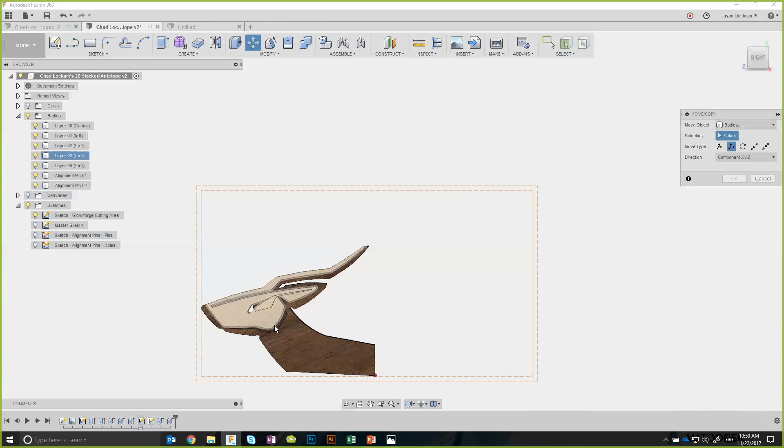We're going to say Move, pick this thing, and this time I'm going to choose Free Move. Free Move is now going to add new manipulators over here. Basically, I can move this thing, rotate it, and move it all in one shot, so to speak. And I love this because it means I could actually place this a little bit more exactly on my Glowforge bed and get it exactly where I want it.

Perfect. Cool, I'm going to do the same thing again, this time using a keyboard shortcut, the letter M. I'll pick this object and move it. It looks like it might not fit over there even if I rotate it, but let's try.

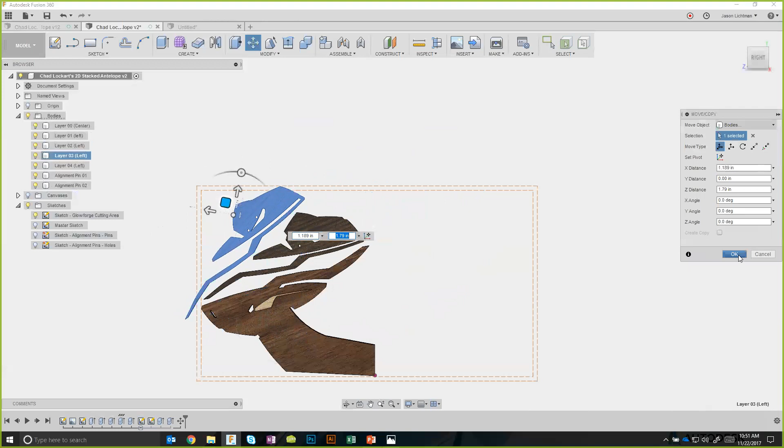You know what, actually I'm liking this. We're going to take this, and now I'll hit the letter M again. This time I'm going to pick all of these components, and we're just going to do a move, shifting it to the right a little bit, just a little bit more.

Now I'm going to hit another move. In this particular case I don't really care how many moves it takes me — the result I want is for this to just fit within the Glowforge. And you know what, I'm not really liking this either, so I'm going to hit Cancel.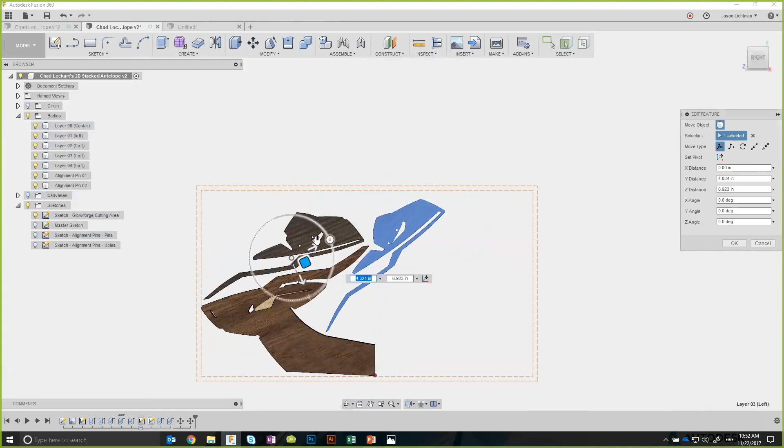We're going to delete the last one, and instead move this part, this lighter wood color piece, all the way over, because really we don't have any room over there. Maybe we'll rotate this around. Much better.

Now, one thing I did differently this time than in the live session — I chose to make this first layer into two separate layers that are exactly the same as each other. I want to point that out because I'm going to have to move one of those as well, so I'm going to move that one.

I'm going to choose this free move. Up — wrong view, right view. We're going to move this thing as well and do some manipulation to it. Much better.

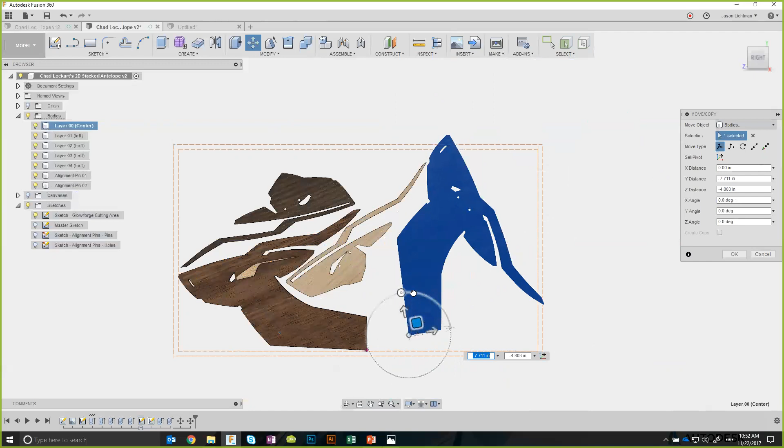Now I am trying to make everything as close as possible to each other, so this way I have as much material free to use later as possible. Keep that in mind — I'd encourage you to do the same. And then this, I could even fit right over here.

Perfect. So now that I have everything laid out how I want it, I do want you to notice that the layers themselves all have different heights, right?

But the laser cutter doesn't really care about that, because all it cares about is the actual profile around the edges. So basically what we're going to do is create a profile on a single plane, and send that to the Glowforge, and then we should be good to go.

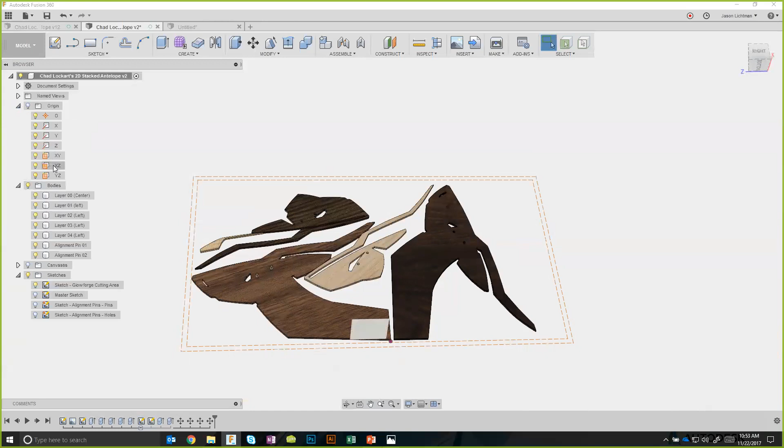So to do that, I'm going to make a new sketch. I'll go under Origin and choose the XZ plane, right-click and say Create Sketch.

Now I'm going to use a command you guys haven't seen before, called the Project command. Under Sketch, Project — I pick this one right here, and there's a shortcut, the letter P on your keyboard.

Now what I'm going to do is come in here and select each of these objects one at a time. I want you to notice that the profile around it is turning pink.

Cool. When I exit out of that, I want you to actually see that in detail, so I'm going to hide the bodies. Now what you're left with is the exact shape of those parts, in two dimensions, one sketch that's looking perfect.

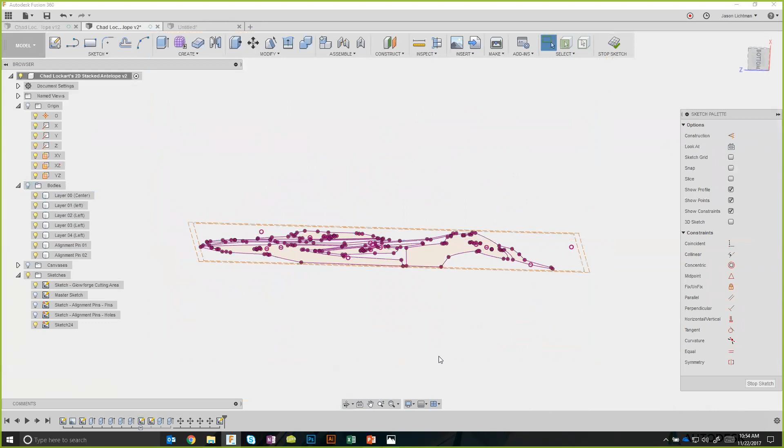Excellent. And again, the pink represents projected geometry, which means the shape that you see there is based on something earlier in time — that thing could be another sketch or a 3D shape.

It's usually going to be one of those two, but basically you could project geometry and use it. Now, for our sake, we're going to take this sketch and rename it — this is going to be called Sketch for Glowforge UI. And I'm going to right-click on this thing and say Save.

There are two ways we could do this if you watched last week's webinar. I'm going to say Save as DXF, and I'll choose here, Antelope ready for Glowforge, Rev1, and save it as my DXF.

Now, DXF is not accepted by the Glowforge, so I do have to open up another program. In this case, I'm going to use Illustrator. Illustrator opening up right now.

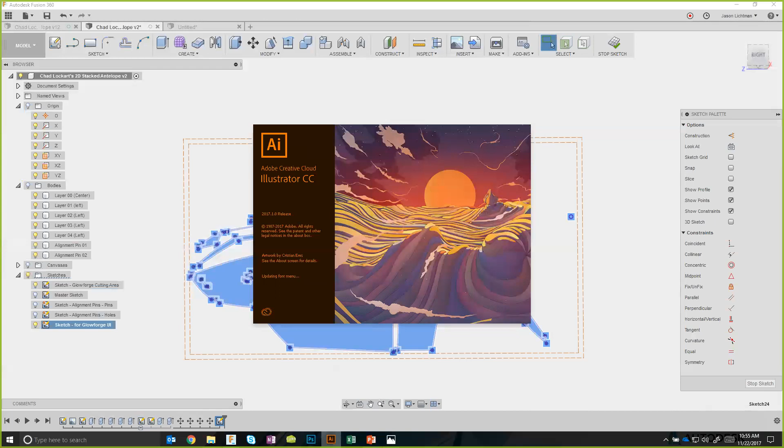Come on, there we go. So I'm going to come in here and open that same file. We're going to go into my laser folder, and I believe we called this Antelope ready for Glowforge 1.dxf. We're going to open that up.

We have to make sure our units are correct. Let's go back to our Fusion, hit stop. I'm going to take a look under document settings here, and it looks like this is already set to inches. No big deal, I'm going to leave this as 1 unit equals 1 inch. Hit OK.

Perfect. This is the shape, and the artboard itself is the wrong size, but it doesn't really matter because I don't really care. I'm going to say Save As, and then choose an SVG for this. That's all I'm using Illustrator for in this case, because the Glowforge UI is going to do the rest.

I'm going to open up a web browser of my choosing and go to app.glowforge.com. I'm going to upload a new design and choose that same SVG we just created. Perfect, and my hope is that everything is going to come in exactly the right place.

Come on, Glowforge. Don't fail us now.

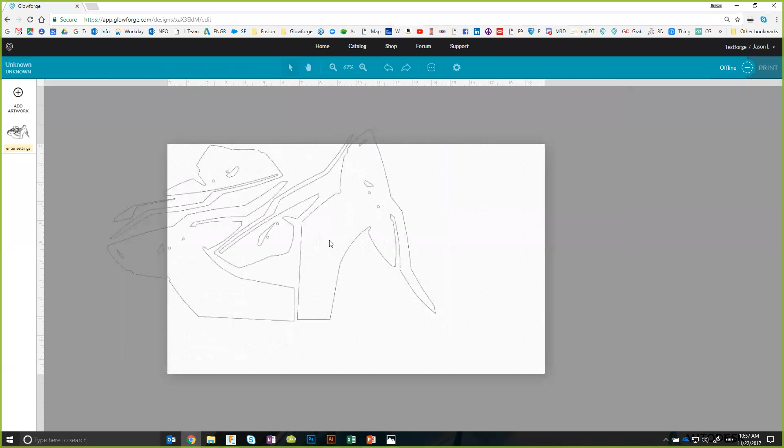Excellent, let's zoom out a little bit. Now the positioning of this thing is not exactly correct, and I think I know why. The reason is because the artboard was not correct in Illustrator. So what I would recommend is to take it in Illustrator from the DXF and actually make sure that the artboard is set up to 19.5 inches by 11 inches.

And then, whatever positioning you put the objects in, let's do that all together. Artboards, artboard options, 11 tall, 19.5 wide, hit OK. Now I could go under layers, choose this entire thing, and actually put it exactly where I want it. We're going to save this as ready for the Glowforge, Rev 2, so we can compare. Save. Perfect, and my expectation this time is that all of these objects would come into the Glowforge UI in this exact orientation.

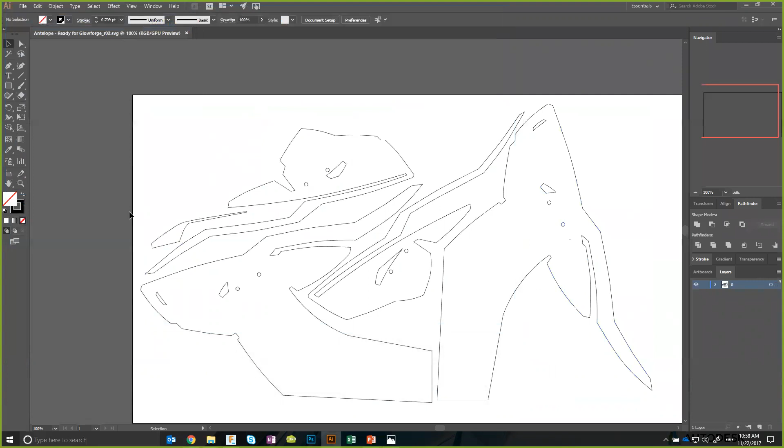So let's go back to, there it is. We're going to go back and upload a new file. It's going to be Rev 2.

While that's happening, let's go back to the Fusion interface and show you the last way you can do this. You can also use the add-in, the Shaper Utility. If you don't have it installed, you could download it from the app store, it's called Shaper Utility. If it's not showing, you can go under Scripts and Add-ins, and I have an add-in here called Shaper Utilities, and I'm going to run it. So now it shows me as an icon here. You could also set it to open automatically whenever you use Fusion. This will always show up.

In this case, I'm going to say Export to Shaper. I'm going to choose a sketch, I'm going to choose that sketch right there, and say OK. And this time, we're going to save this as Rev 3.

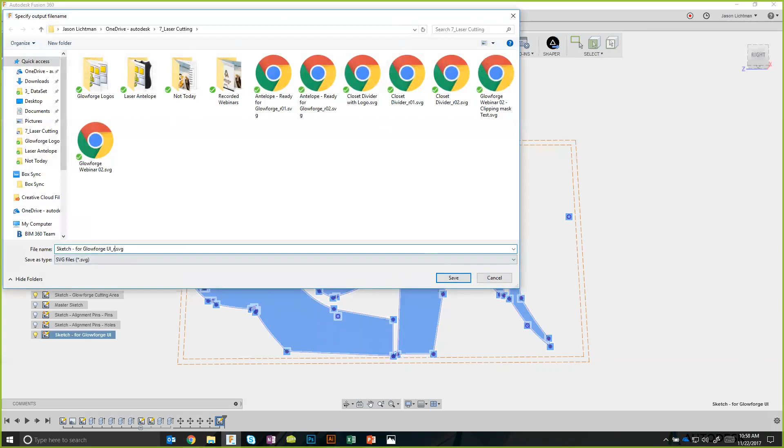So we can compare, go back to the Glowforge UI, and this time this is exactly what I expected. Everything is in the exact right position. This, by the way, I'll just repeat, is the one that was saved as a DXF, brought into Illustrator. The Illustrator artboard was changed to the correct size, and the files themselves were positioned correctly, then saved as an SVG. And again, it comes in here perfectly.

And then the second one, the one we're about to upload right now, which I believe is Rev 4. Hold on, there it is. This one is going to be the one where we used the Shaper Utility to save the sketch as an SVG directly from Fusion. We'll see what we get in just a moment.

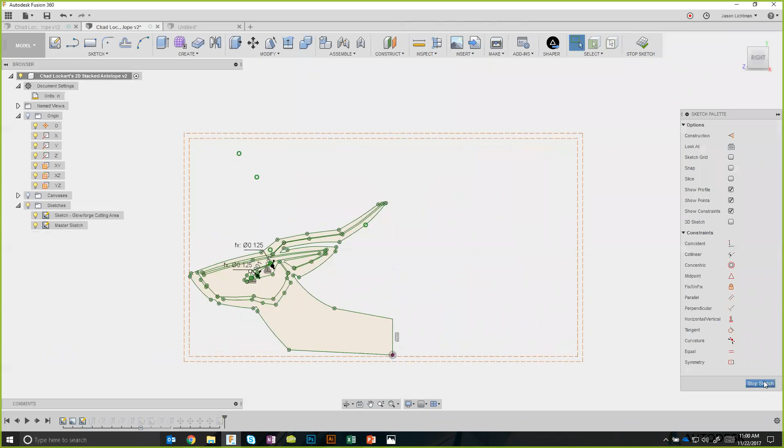You start off by bringing in a canvas, then you sketch on top of it. Now, I do personally recommend a single sketch for all the layers, I think that makes your life a whole lot easier. Then I extruded each of those layers into its own 3D thing.

So let's look at that right here. I created this layer, then I created the next layer, then the next, and we kept doing this until we had all of our layers.

Then I introduced the alignment holes and the alignment pins. Show that again. If I hide layer 4, you should be able to see that. Those are those pins right there.

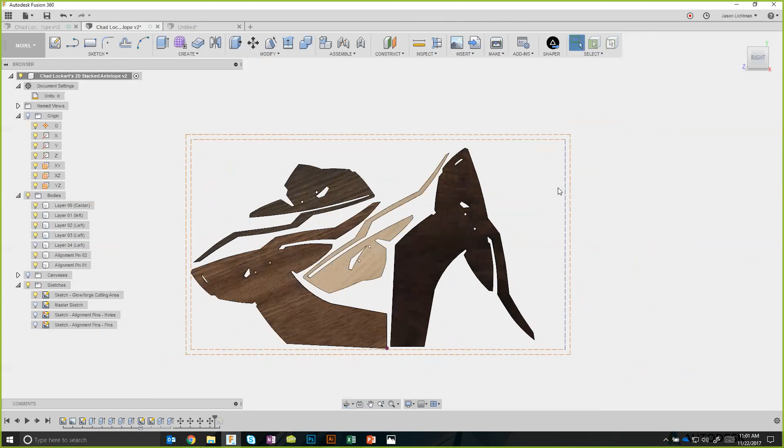Then we took all of these objects and moved them into position relative to the actual Glowforge bed, the bed being this orange rectangle over there. And even though these were different heights, we created a single sketch that we projected the geometry from all of those objects. And that ended up being this pink sketch at the very end right here that's within the Glowforge UI.

And then we showed how to save it two different ways. First way is right-click on the sketch and saving as a DXF, bringing that into Illustrator, and then saving that as an SVG. And then we also showed how to take the Shaper utility and export the sketch directly as an SVG. In either case, the result is uploading an SVG into the Glowforge UI to yield your laser cuttable files. So that's how we showed how to do that.

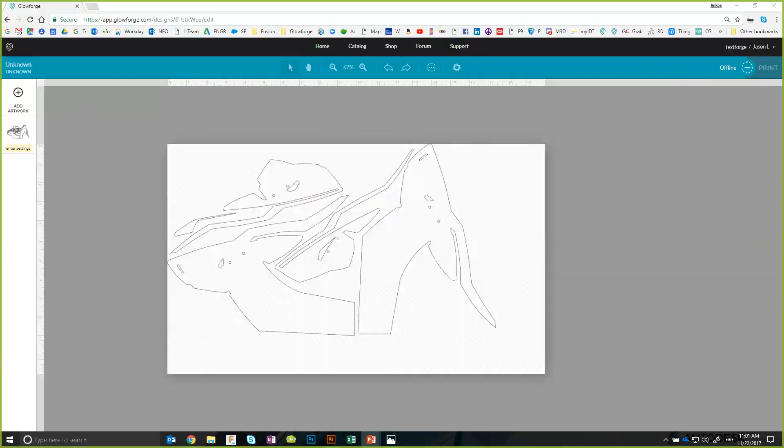We're also going to show how to make the plaque, in this particular case, parametric, meaning you can automatically change the actual positioning of the plaque relative to everything else.

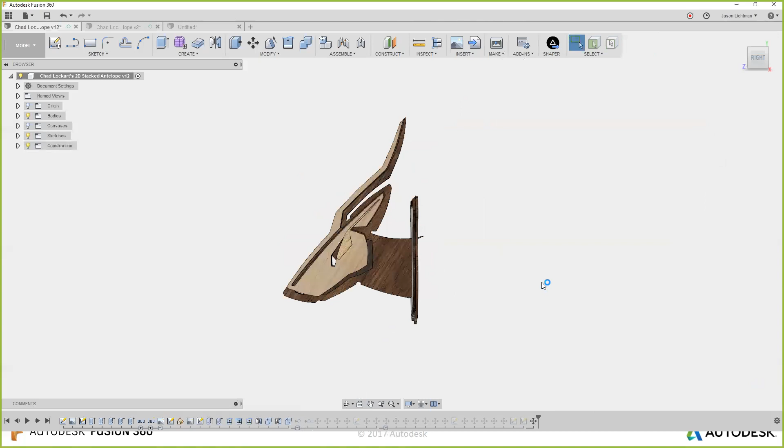So a quick little preview. If I go over here, you can see the plaque is at a particular angle. I can actually come in here and change the angle itself of my plaque, and everything is going to update automatically here within Fusion. That's pretty darn cool, and we'll show you how to do that.

And that's what we're going to do for webinar number 4. Webinar number 5 is going to be to take a 3D object and slice it into laser cuttable layers, and then how to reorient those slices for sending to your Glowforge. And live webinar number 6, the agenda for that one is yet to be determined.